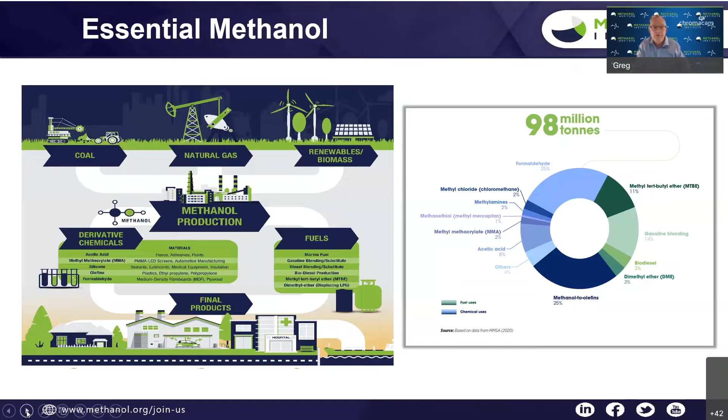Methanol, CH3OH, is made from synthesis gas, a combination of hydrogen, CO, and CO2, and these elements can come from several pathways. Recently, the Methanol Institute released a joint report with the International Renewable Energy Agency, Innovation Outlook Renewable Methanol. This is the first comprehensive assessment of renewable methanol.

These days, we all like to color code our fuels. For methanol production, at one end, we have coal-based methanol, which is pretty much exclusive to China and could be considered brown methanol. Conventional natural gas-based methanol is gray. Blue or low carbon methanol will be based on natural gas feedstock with the addition of renewable electricity or green hydrogen, and possibly CO2 captured from a neighboring industrial facility to reduce a plant's overall carbon footprint.

Now, green methanol can be biomethanol produced from biomass gasification of municipal solid waste or forestry residue, or from biogas produced at landfills, wastewater plants, or animal agriculture.

Green methanol also can be made from green hydrogen produced from renewable electricity through electrolysis, plus CO2 from either biogenic sources, flue gases from essential industries such as steel and cement, or in the future from direct air capture. This is often referred to as e-methanol, which is an electrofuel, an e-fuel, a synthetic fuel, a power to liquid fuel. We have a lot of names.

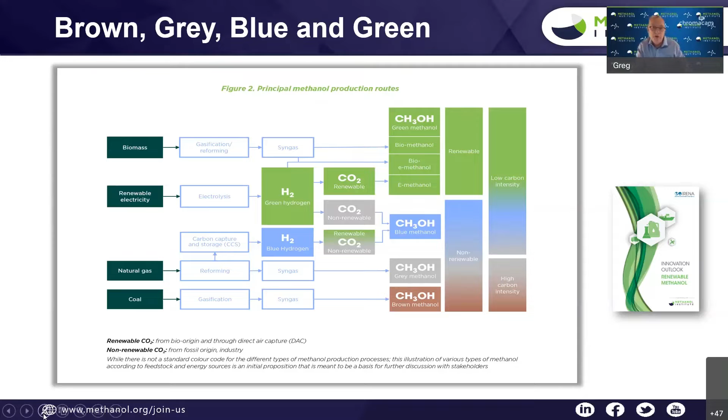Often these two green methanol pathways, biomethanol and e-methanol, are referred to broadly as renewable methanol. Now, the challenge over the next decade will be the ramp up to production of biomethanol and e-methanol to greater commercial volumes. This is a map of current biomethanol and e-methanol facilities in operation and those that are now under development.

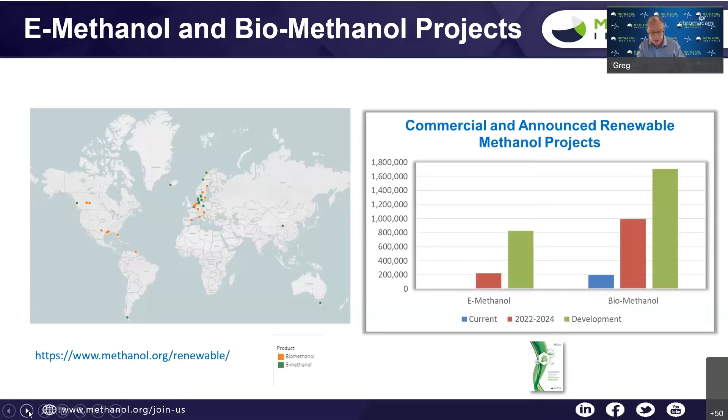Current commercial plants and announced projects represent roughly 1 million tons of e-methanol production capacity and 3 million tons of biomethanol production capacity. But keep in mind the methanol molecule CH3OH is the same whether it's produced from gray, blue, or green feedstocks. Conventional natural gas-based methanol can be used in new builds and retrofit vessels today, with the introduction over time of more biomethanol and e-methanol as we facilitate the transition to low carbon and net carbon neutral methanol, with more ships using methanol as the fuel and the market expands.

Our joint report with IRENA also provided intricate assessments of the cost of renewable methanol production today and where it's heading in the future. Current spot market pricing in the U.S. Gulf Coast is $380 per metric ton, or the high end of the light gray bar shown on the bottom here. Depending on feedstock costs, some biomass and biogas processes are economically competitive today with conventional methanol, as shown in the green bars. Where we can expect to see dramatic cost reduction in line with expectations for more affordable green hydrogen is in future production costs for e-methanol, pictured here in the blue bars.

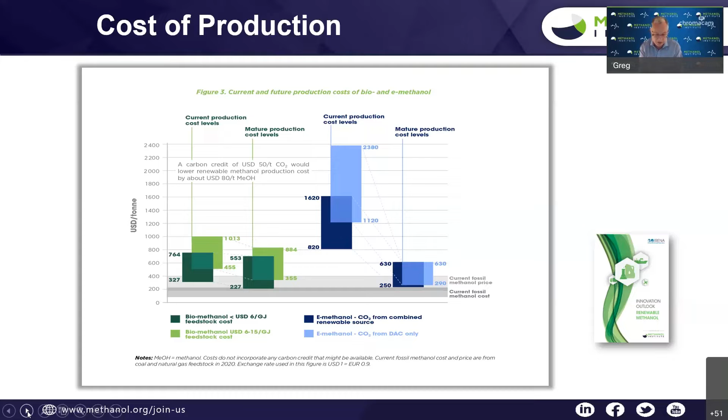All alternative fuels will be more expensive to produce than conventional fuels. That's just a fact. How much more expensive depends on the availability and cost of renewable power or biogenic feedstocks, and the proximity to major alternative fuel hubs. Based on our experience with both e-methanol and biomethanol production, we can readily predict costs will fall with scale and improved efficiencies to become competitive with conventional fuels.

Methanol does have half the energy content of diesel bunker fuel, so you need nearly twice as much methanol to provide the same range as diesel fuels. But even on an energy adjusted basis, we've seen that methanol has been price competitive with traditional diesel bunker fuels.

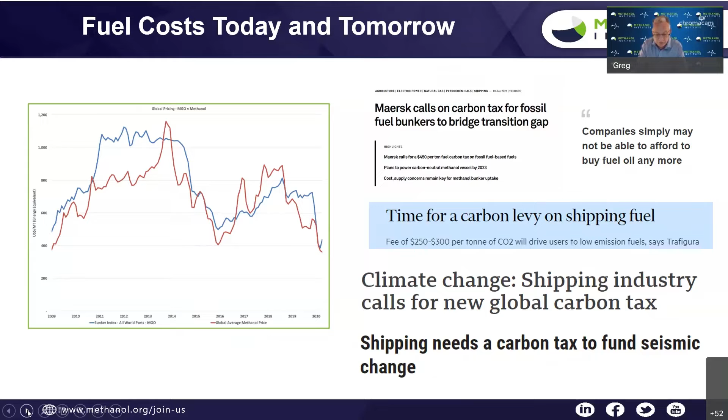Today, there's a call by many, including the world's largest shippers, for a carbon tax on diesel fuels. Clearly, a tax on diesel bunkers would dramatically change this pricing picture for marine fuels, with the only available options today besides diesel fuels being advanced biofuels, LNG, and methanol.

When we look at fuels for the transport sector, energy density matters. Again, while methanol is just half the energy content of diesel bunker fuels, it's a liquid at ambient temperature and pressure with a higher energy density than other alternative fuels like ammonia, hydrogen, or batteries. From the perspective of energy density, logistics, and fuel storage, methanol is a much more efficient energy carrier.

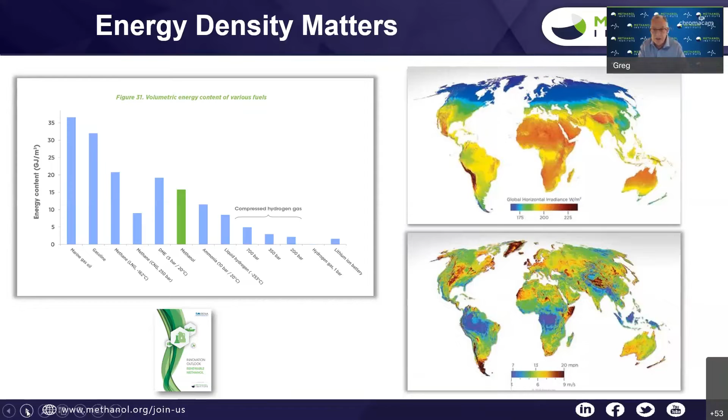If we think of the global resources for solar and wind power, it'll be much easier and cheaper to turn these green electrons into liquid methanol and move it around the world.

Today, around the world, methanol is being used as a fuel for cars, trucks, ships, industrial boilers, cook stoves, kilns, home heating, and as a hydrogen carrier for fuel cells. As we look ahead to potential markets for road transport, and particularly in shipping, methanol demand could greatly exceed the growth we've seen to date.

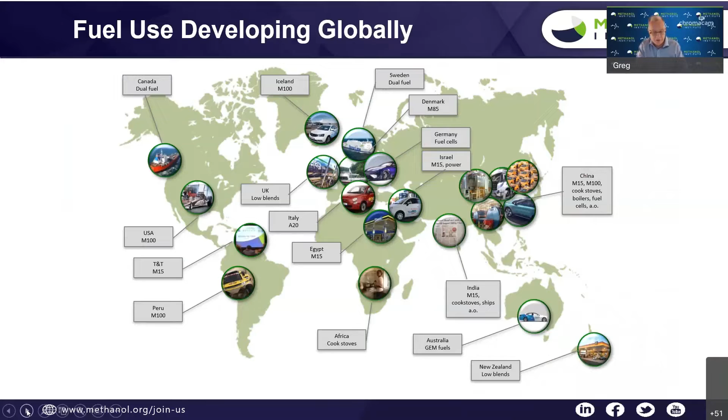There are now a number of leading shippers such as Maersk, which are not only considering methanol as marine fuel, but have already adopted it or are announcing plans to include methanol within their fuel pool. These first movers understand that little time is left to wait on potential solutions which might fulfill 100% of the 2050 goals. We don't have 30 years to wait.

Maersk announced in March that their first carbon neutral vessel would launch in 2023 running on methanol, a full 7 years ahead of schedule. Recent press stories note that Maersk is now looking to place a $2 billion order for 12 15,000 TEU container ships running on methanol.

And I'm sure this makes Kjeld very happy.

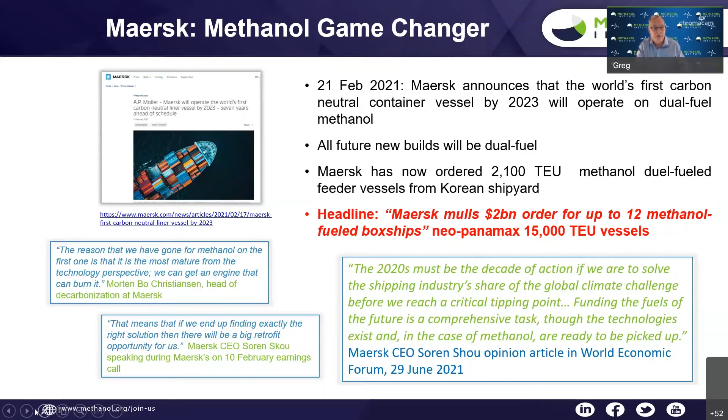Maersk sees methanol as a viable option for both new builds and retrofit vessels. There are vessels on the water today using methanol dual fuel engines, including a dozen 50,000 deadweight ton chemical tankers with MAN two-stroke engines.

One of the world's largest RoPax ferries has been operating on methanol for 6 years now, using Wärtsilä four-stroke engines. We've run a pilot boat in Sweden and a dry bulk barge in China on methanol. There are also vessels that use methanol as a hydrogen carrier for the hotel load or for propulsion. These ships have allowed more than 100,000 hours of operation on methanol so far.

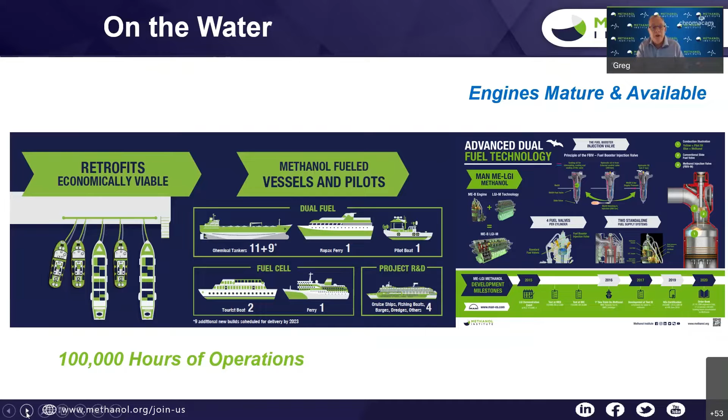More methanol-fueled ships are on the way. As you can see from these recent announcements, the vessels being built now include more chemical tankers, tugboats, workboats, yachts, and cruise ships. Methanol can be an attractive option for ocean-going vessels, short-sea shipping, workboats, port and inland waterway type vessels, and fishing fleets.

Global methanol producers like Methanex and Proman have invested in methanol-fueled vessels, showing industry support as first movers. And we'll hear from Proman shortly.

Last fall, the IMO adopted safe handling guidelines for the use of methanol on board vessels under the IGF code for low flashpoint fuels. This has been an important milestone in the growth of methanol as a marine fuel. As you can see here, this process took a number of years. And while LNG paved the way for methanol, methanol's adoption can be a model for ammonia and hydrogen in the future.

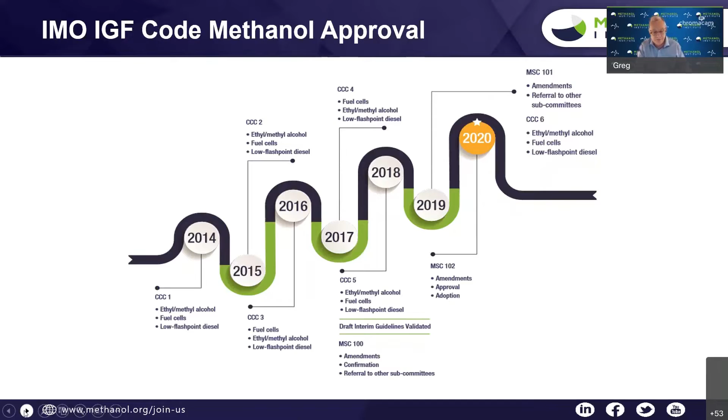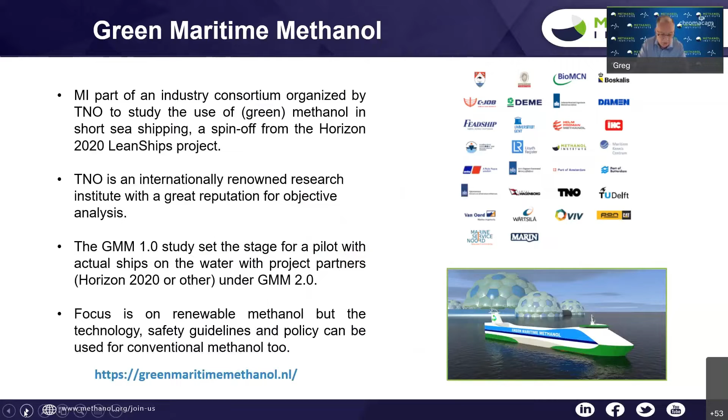Let me quickly mention two projects that we're involved in Europe. First is the Green Maritime Methanol Program in the Netherlands. This is moving to the next stage, GMM 2.0, with the adoption of methanol for short sea shipping in the Netherlands. The Fast Water project, also in Europe, is looking at workboats and river cruisers, with a pilot boat launching in Sweden this fall and 2 tugboats launching in the port of Antwerp early next year.

Now, methanol is one of the world's most widely shipped chemical commodities. Again, we produce 100 million metric tons. About half of that will move from one continent to another. Methanol storage is already available at more than 100 of the world's largest ports.

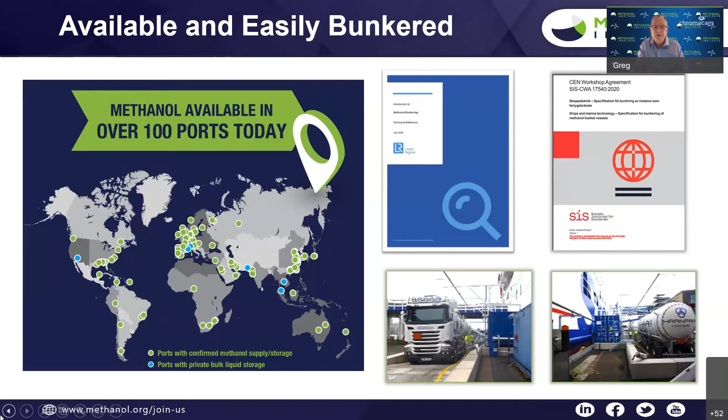Again, as a liquid at ambient pressure and temperature, the handling of methanol is very similar to that of diesel bunker fuels, making methanol an affordable option for bunkering.

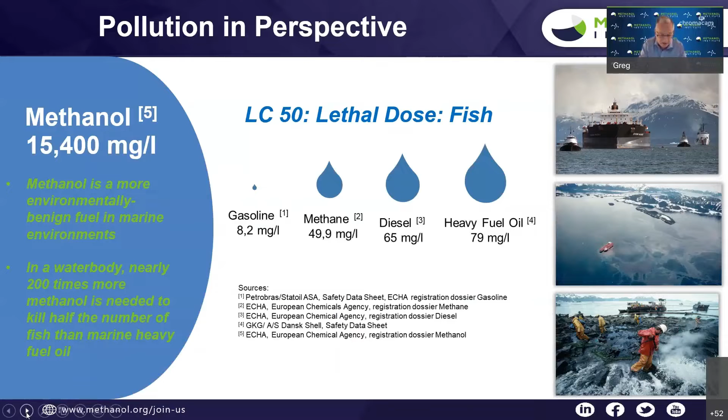Methanol is also a more environmentally benign fuel than diesel bunkers. Nearly 200 times more methanol is needed to kill half the population of fish in a water body compared to heavy fuel oil. I like to say that if the Exxon Valdez had been filled with methanol instead of oil, you could have gone back to that site 2 days later and not found a trace of methanol.

I will talk about the MAN B&W LGIM engine - it's liquid gas injection methanol engines. We have a number of dual fuel engines today, and except for one, which is a MEGA engine based on the Otto cycle, they are all diesel-based engines. That means the diesel principle applies for methane, ethane, methanol, LPG, and also the coming new ammonia engine. We expect there will be several different fuels in the future.

As technology providers, we listen to the market and see what is required, and based on that we make priorities in our development and planning.

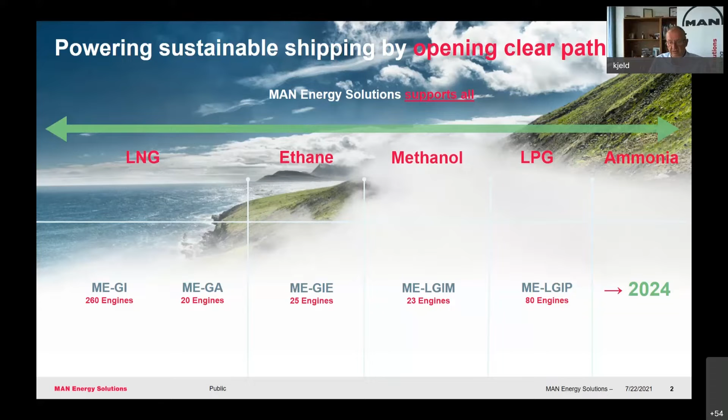The history of our first methanol engine: we could see the need from the market, so we made demonstrations here in Copenhagen on our test engine number 1. Then we had tests at Mitsui, one of our big licensees, and another big licensee at Hyundai. Then the first sea trial on methanol was here in 2016, so it's been quite a number of years where we have actually been operating on methanol.

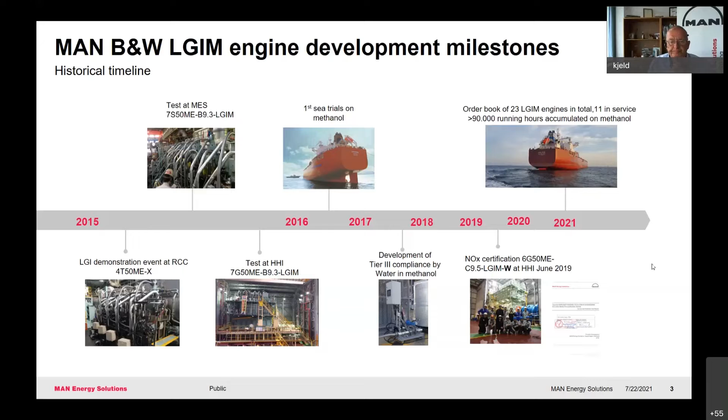Methanol itself, as Greg also specified, has a specific energy compared to other liquids - about twice the amount is needed to give the same output as MGO. But the efficiency of the engines, the power output, and everything is exactly the same when we base it, as we have done here, on the diesel principle.

We will not be sensitive to the quality of the fuel itself or to ambient conditions. The operator will really not feel whether he's operating on methanol or operating in diesel fuel mode.

Also mentioned by Greg, we have the methanol at normal atmospheric pressure. We have a supply system - quite simple - at 8 to 10 bar, the same as we use for MGO, and a booster system which pressurizes the methanol up to 600 bar when it's injected into the combustion chamber.

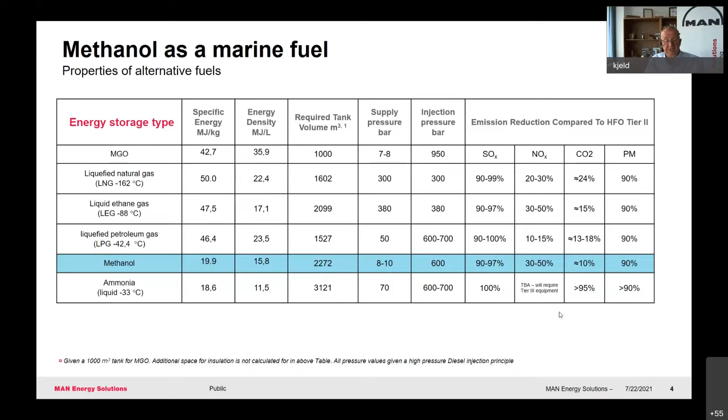SOx, NOx, and particulates have quite a reduction, and also 10+% reduction in CO2 when we compare to what we have seen on our heavy fuel oil burning engines.

Today we have the G50 and S50 - 50 is the bore size in centimeters. Our engine program goes from 3 megawatts up to 83 megawatts in different engine sizes, so not all engines in the program are actually ready now to burn methanol.

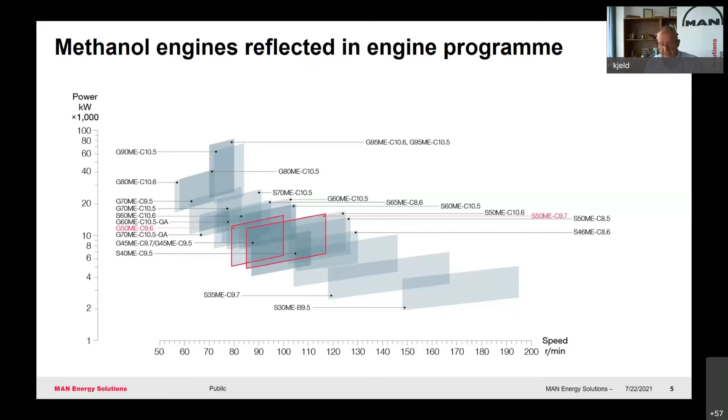But again, coming back to the request from the market, there will be many more different engines that can burn methanol in the future - at least this is our expectation. This is our reference list today, and we have a total of 23 engines ordered for methanol operation.

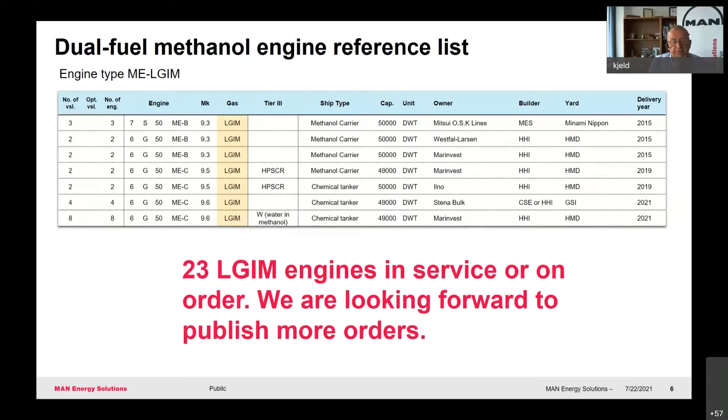The 2,200 TEU feeder container vessels for AP Møller, as Greg also mentioned, is not included in that, but will be, of course. Without going into more detail, I would say we expect a lot more orders for methanol engines shortly - in due very short time.

The complexity of the installation and the price are also very important when you compare the different dual fuels. Together with the Methanol Institute, DNV, and Hyundai, we have made a study to see what the real price difference is.

It's for a tanker of about 54,000 cubic meters. If you say the capex here is 100%, then it would be 110 for the methanol burning engine and vessel, but it will be 122 if it's LNG. So there is actually quite an increase in capex when you use LNG instead of methanol, and it will still be the same efficiency you get out of the two vessels.

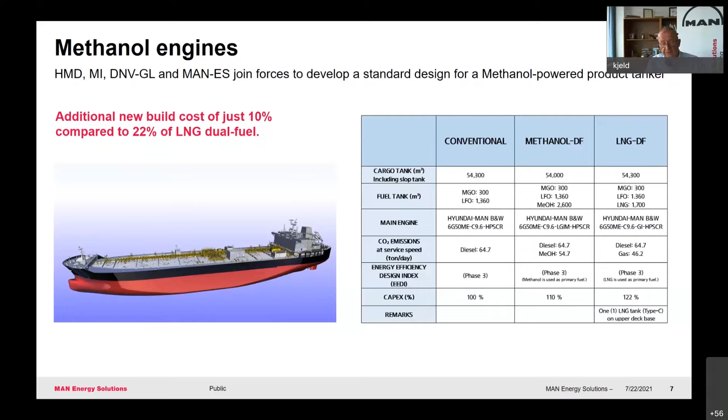Here is the world's first barge-to-ship bunkering of methanol. Of course, that will be much more needed as non-methanol carriers now start to burn methanol on board.

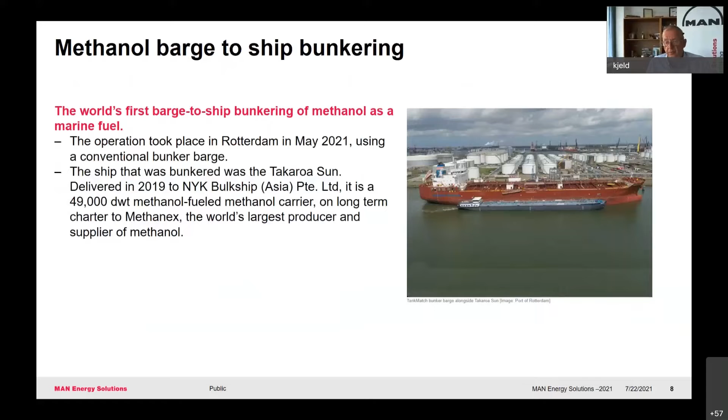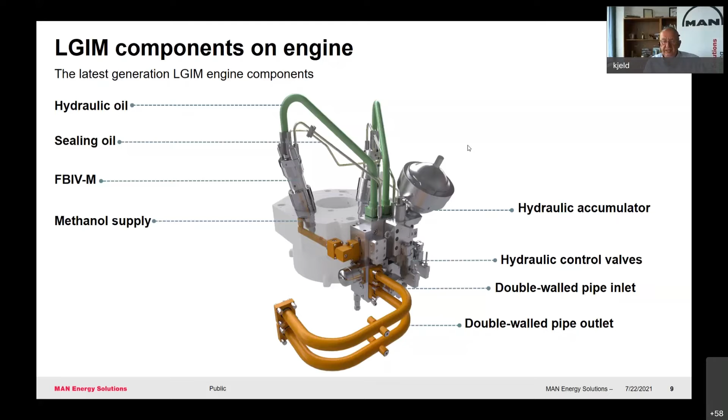Methanol is not really a good lubricator, so we also use sealing oil where we have lubricating of the moving parts and so on. So all this is, of course, considered in our design and so on.

Here we have a sequence of pictures for different fuels: gas oil, methanol, methane, ethane, and LPG. You will see here in this sequence how the burning actually shows, but also the real ignition. From this movie sequence, one can clearly see that all the fuel burns in the classical diesel process, and that the level of soot radiation varies significantly. And if you see here in the last one, with methanol, it emits a very low level of visual radiation, and that's of course also an advantage.

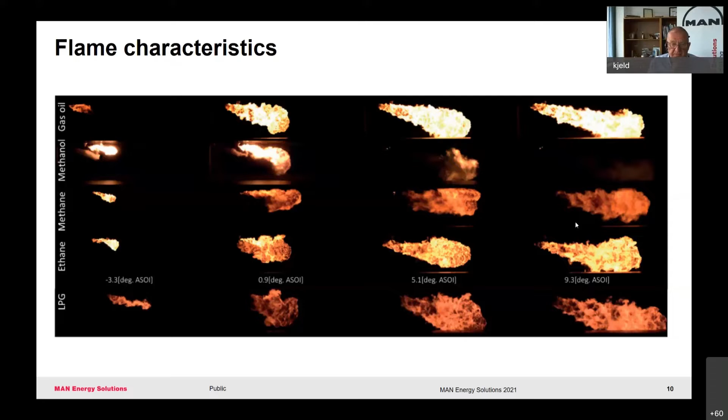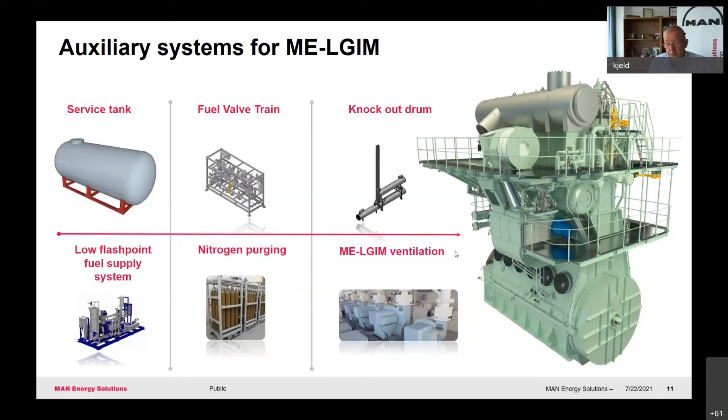We go into hazard investigations for all the dual fuels, new fuels, low flashpoint fuels, which are introduced to our engines, and we do a lot of them together with classification societies, yards, engine builders, and of course also operators and ship owners.

We have a fuel gas supply system, and as mentioned before, 8 to 10 bar before going into the engine, very similar to a normal fuel oil burning system. We have a low pressure pump from the tank. After the tank, we have a high pressure pump for the circulating system and so forth. And it really works and is quite simple.

Also, you can say this is shown or reflected in the CapEx difference between the LNG cryogenic type systems and here the liquid systems.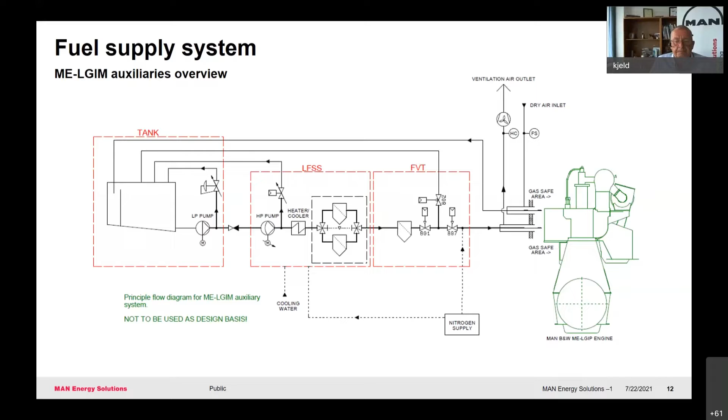We normally have in the diesel process this very high efficiency, but we also have a high peak temperature in the combustion chamber actually creating a lot of NOx. Now the NOx level for methanol is relatively low, 30 to 50% lower than it is for fuel oil. So you can say you have a good start, but on top of that, we are actually able to put water in and mix it with the methanol and reduce the peak temperature and therefore the NOx formation. Otherwise, in the other dual fuels, you need to use an SCR or an EGR solution in order to be in compliance with Tier 3.

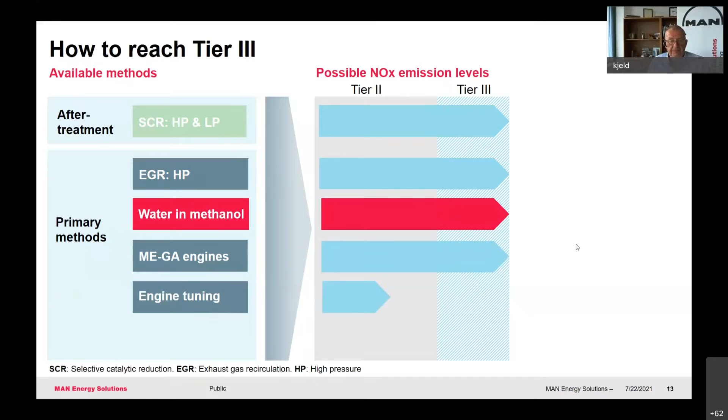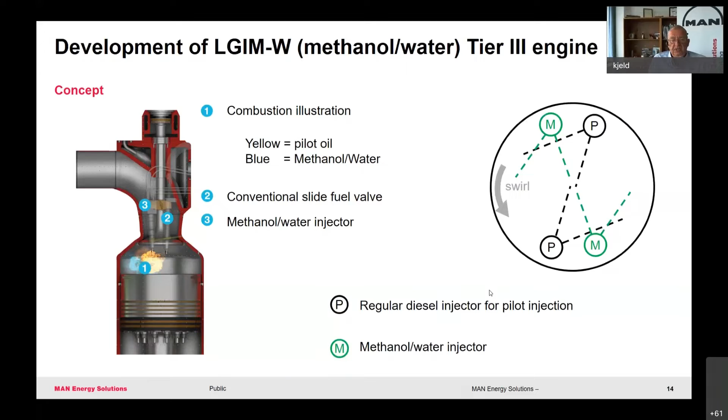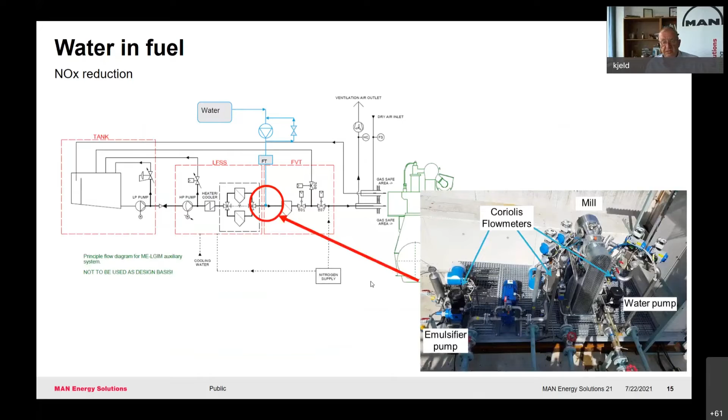This is how we blend water in, and the last many engines sold are actually sold with this system where we put water into the line here and mix it very easily, you could say, in a mill into the methanol before it goes into the engine, thereby reducing the NOx level.

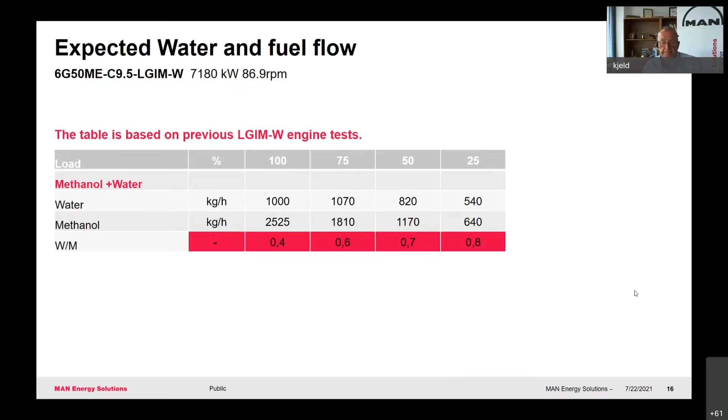This I will not go in detail with. Greg has already shown that, and as Greg said, we will be happy about this, and for sure we are very happy and speak a lot with Maersk about it also in these projects, that's for sure.

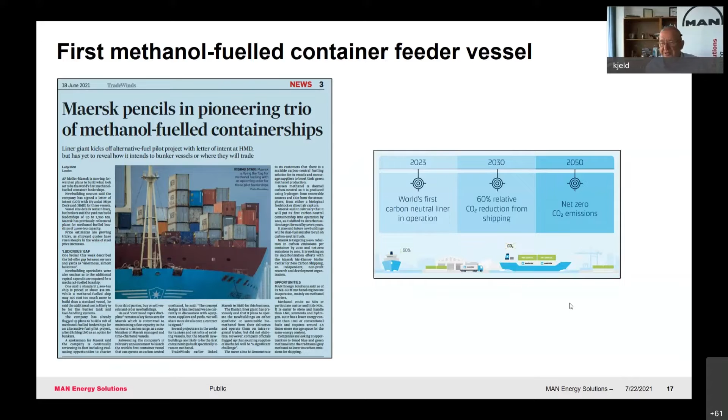We have a methanol paper, if you like, and there are contacts here where you can see.

The diesel principle also has this, or you can say the beauty of the diesel principle, but basing that on the dual fuel engine, is that you can go from an MEC, that's a full electronic control engine, and you can retrofit for LNG, LEG, methanol, LPG, and coming for ammonia. And we have already made some of these retrofittings.

We have retrofitted one of the MEC engines to ethane, 3 to LNG, and 7 or 8 now for LPG, and 7 or 8 are still waiting in process on an order. There will be much more in the future. And if the CO2 taxes hit on and so forth, then suddenly there will be a bigger business case to go for those alternative fuels.

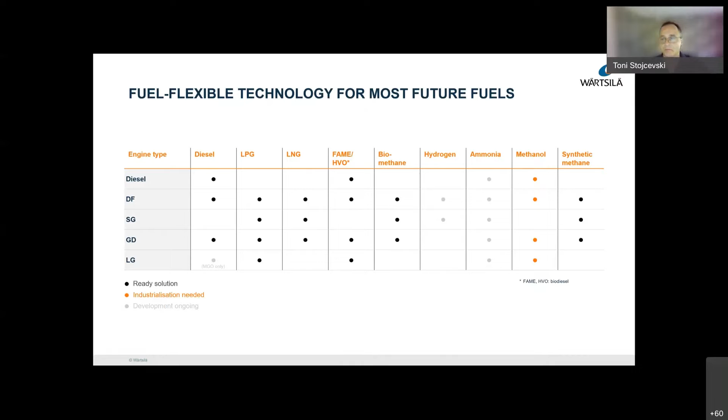We have invested around 50,000 engineering development hours in methanol technology. The first concept study was done back in 2011, where we started looking into alternative fuels and identified methanol as one of the best options and alternatives compared to HFO. Back then this was driven by the SECA legislation and SOx, now we are moving into decarbonization, but the availability and option for methanol is still there. Since 2013 we have been continuously investing development hours, and we have 6 years of continuous operation on Stena Germanica since the conversion, so there is great accumulated knowledge we can apply to future solutions.

Now, not repeating what was said by Kjeld and you, Greg - I think both of you made quite some good points, so I will try not to say the same things again. But when choosing combustion technology for methanol, we started from the phase of methanol, and methanol is a liquid. It's an alcohol, so compared to all the other alternative fuels, it's liquid at atmospheric pressure and temperature. Injecting it via port injection, as you would normally do with gas, would mean the methanol is in touch with the port inlet and the combustion chamber. And we all know methanol is highly corrosive, which might affect the lifetime of the engine.

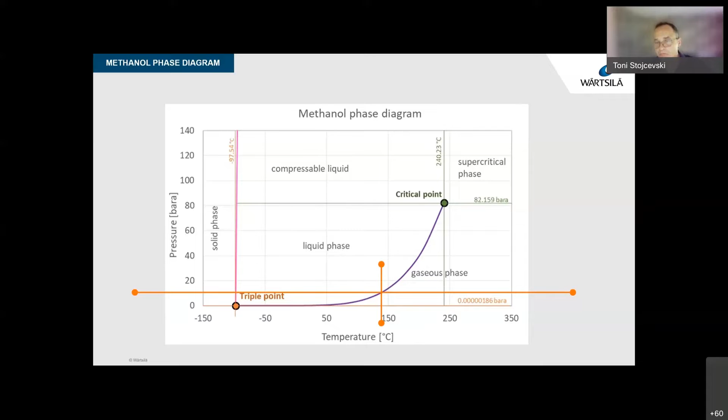The technology layout that we chose was originally adapted from the gas diesel engine, and then further developed for a conversion to Stena Germanica. So we started from an existing technology and then did the tweaks to accommodate methanol.

The main development is around the injector, which in this case is a dual fuel injector that can accommodate both fuels simultaneously in the same body. So we use one injector for both fuels, and this injector is designed to have 100% output on either methanol or diesel.

The control of the injection for methanol is done by hydraulic oil and a solenoid valve, electronically controlling the opening and closing of the methanol injection. The methanol is injected at high pressure in a common rail system, pumped by a single pump before the engine, at pressures similar to what we saw before, around 600 bars in the common rail.

We also use the standard diesel jerk pump for both pilot fuel injection and full diesel output operation, so the same pump is used. Switching between fuels is simultaneous and seamless. You will not notice any change in operation mode or drop in load or efficiency, and it can happen at all loads, back and forth.

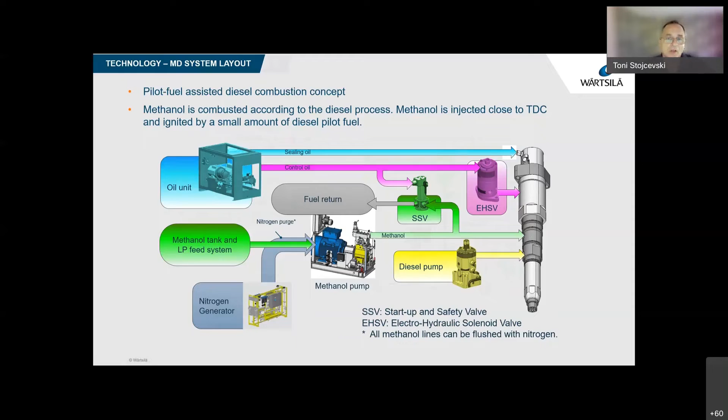How this works is that when the piston is close to top dead center, the cam presses the diesel jerk pump, which injects a small amount of pilot fuel in this yellow line, and that is ignited by compression and temperature. At that moment, when there is an ignition flame in the combustion chamber, we start injecting the methanol on top of that flame, which is directly ignited and combusted, pushing the piston down. So the methanol burns at the flame, and it burns completely without getting in contact with any parts in the combustion chamber.

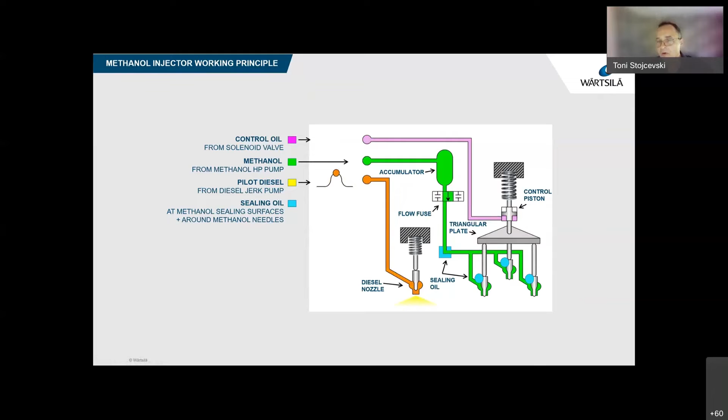The performance of methanol combustion shows that NOx levels are lowered by 60% in our case. So we are not as near to tier 3, but quite close, and we have also done tests with water blending and see that we can reach tier 3 compliance.

When we talk about retrofit conversion, it's important to notice that converting to methanol as fuel is not seen as a major conversion by the classification societies, and as such it will not require new tier compliance. We can just prove that we have lower NOx emissions and don't need to recertify the existing tier compliance, but can keep it as is. For retrofit, we are not compelled to meet tier 3, maybe only in certain cases where local legislation requires it, and that can be achieved by water blending.

We see that combusting methanol creates zero particulates, which affects the smoke emissions. So the only smoke emitted comes from combustion of the pilot fuel, and it's barely visible, maybe at very low loads where there is more pilot fuel ratio compared to methanol, but on higher loads there is no visible smoke with methanol.

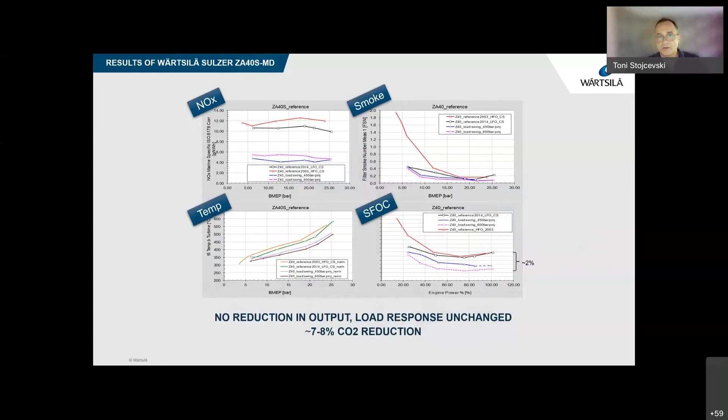So there is an addition of new piping system, and we do change the cylinder head because we have a bigger injector, but none of the engine parts below the cylinder head are changed. So the engine remains intact when it comes to piston rings, liners, and all the parts in the lower part of the engine. Of course, there is a lot of cabling and a lot of automation and safety systems.

This is quite an installation. It's specific, depends on what is your starting point and how old the engine is. This ship was originally commissioned in 2001, and it was already 14 years old when we retrofitted it to methanol. It's now 6 years in operation with these 4 converted engines in methanol.

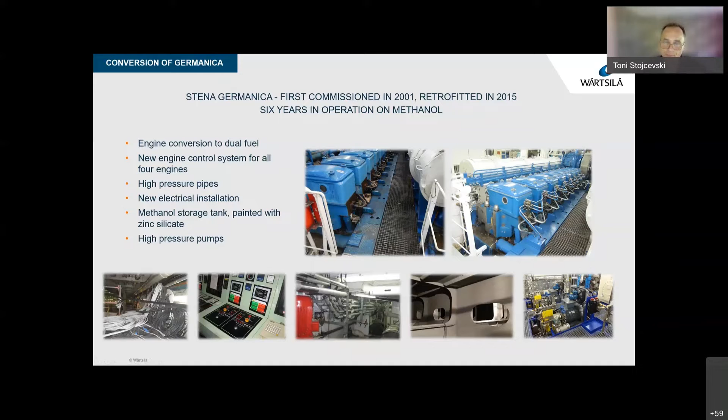We do have a plan for releasing another engine type based on the 32 bore. This is a development which is planned currently, and it's proven technology. The Wärtsilä 32 engine is already on the market, and we have around 4,000 engines delivered since the conception of the 32. It's still a portfolio engine that we deliver today and will be delivering in the future.

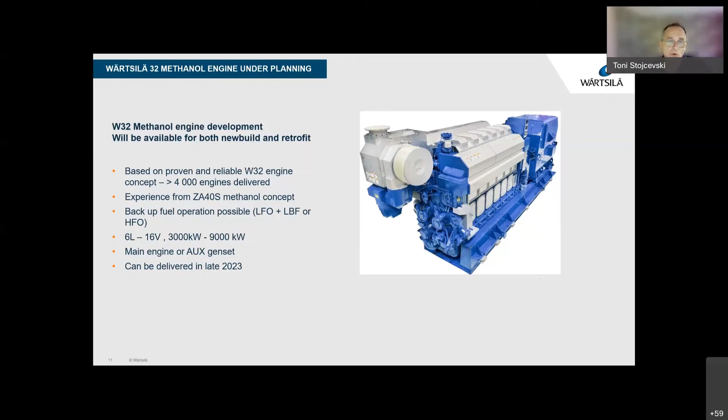It's in the power range from 3 megawatt to 9 megawatt, and fits a lot of installations, both as a main engine or as an auxiliary genset. This engine will be based on similar technology to what I just showed, and could be delivered both as a retrofit of the existing 32s or as a new 32 engine from late 2023.

Looking into the future, renewable fuels are the path forward, and methanol as a transition to this is an excellent starting point, as we saw from Greg's presentation, that it can be produced from a variety of feedstocks, and the main benefit is that it's liquid at atmospheric temperature. It does not require cryogenic storage. It can easily be transported through various supply chains and bunkered on board. So we do see that going forward, bio and methanol as a hydrogen carrier would be a great essential fuel for the path to decarbonizing the shipping industry.

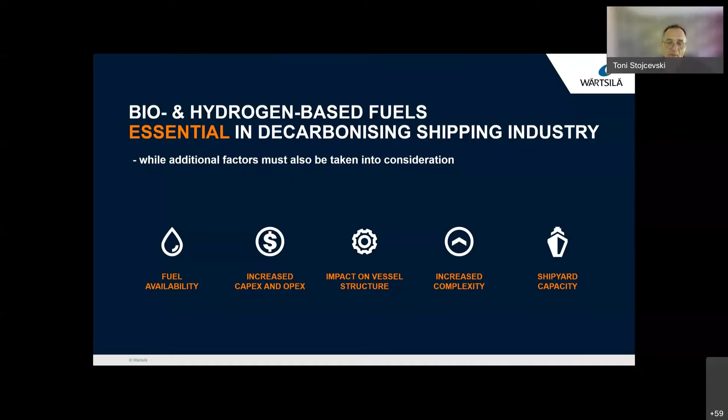With that being said, the last point from myself and from Wärtsilä is that, looking into the future, we will have multi-fuel engines that will have a different fuel injection system and will be capable of burning various fuels like hydrogen, ammonia, methanol, and other possible carbon neutral fuels. And this is the path that we will continue exploring and developing our engines.

Okay, hi, good afternoon everyone. Hopefully the technology doesn't fail me, let me just try to share my screen. Hopefully, Greg, you see it in presentation mode. Well, let's get your notes too, but no, it's the 2 slides. That's odd, because I see it's in presentation mode. That's better, I did it. Oh, did it change now? Okay, yes, okay, try it again. All right, that's good.

Good, thanks, all right. So good afternoon everyone. You know, technology is something that sometimes fails with all these webinars we're doing, it's definitely been different. So as Greg mentioned, I'm here to offer the view and our perspective as a producer, and how we view methanol as a future fuel in the market.

Let me start by giving some background on our company. Proman, we're a global leader in petrochemicals with methanol, ammonia, and urea ammonium nitrate assets globally. As some of you may know, we're actually the second largest producer of methanol in the world, and we have our production assets in Trinidad and in Texas. We always boast that we have the largest methanol plant in the world - well, at least we used to - which is in Trinidad, the M5000 plant, and the smallest methanol plant possibly in the world too, which is in Pampa, Texas.

We have also a plant in Beaumont, Texas, where we have a joint venture with OCI, and we have a methanol plant in Oman, which is the OMC plant. Because we're also involved in ammonia, we have our joint venture with Koch for ammonia plants in Trinidad.

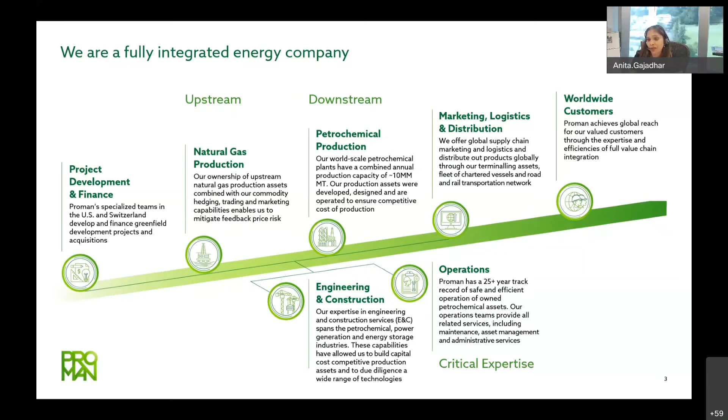So many of the presenters before have spoken about the challenges we face in the international maritime sector, but one of the major challenges we will face in the upcoming years, of course, is the IMO reduction rules on carbon intensity, and the fact that by 2030 we have to shift to at least a reduction of carbon emissions by 40%, and by 2050 carbon intensity requests to reduce to about 70%.

Now that's the IMO, and it's been debated because a lot of the global leaders have even stricter regulations. Last week the EU came out with their Fit for 55 obligation, where they'd like to reduce emissions by 55% by 2030 in the EU, and become carbon neutral by 2050, which is different from the IMO's targets, and it's something the shipping industry will have to work together to try to meet. We've also heard the US speak about their carbon neutral targets by 2050, and Great Britain has pledged to reduce their CO2 emissions by 78% by 2035. Even China is saying they would like to be carbon neutral by 2060, I believe.

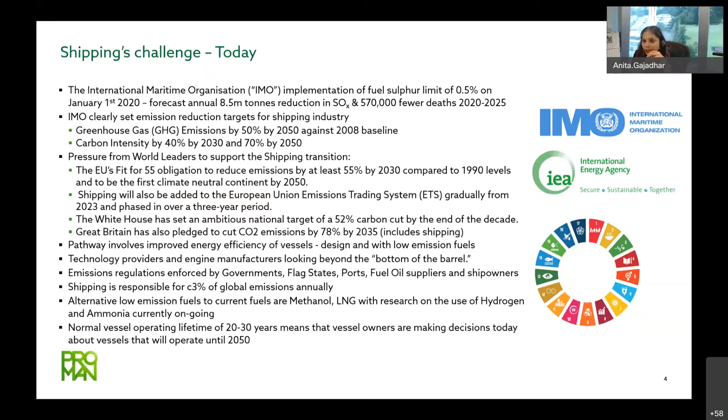Shipping, as many of you will know, is responsible for 3% of global carbon emissions globally. And it might sound very small, but if you look at the industry as a whole and the targets we have to meet, it will require a significant amount of fuel - not just methanol, but other alternative fuels, which we've been hearing more and more about in recent times.

So why methanol? I don't want to go into a lot of details because Greg would have also mentioned a lot of these things, but it is a clean burning fuel. We also view it as cost competitive. When you look at the long-term pricing, which I will speak about later, it is competitive when compared to alternatives. In terms of bunkering, it is easy and safe to bunker, and available in more than 122 ports, as previous presentations would have shown. The capex for modification of vessels is a lot cheaper than LNG, so you don't have to put out as much in capex, and it is fully biodegradable, which I think is one of its strongest points.

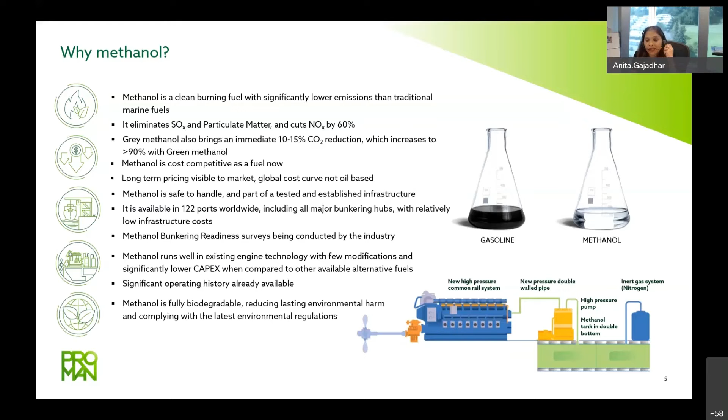I won't go into too much detail here because Greg gave a very good explanation on gray methanol, blue methanol, and green methanol, and the fact that whether methanol is produced as a green, blue, or gray molecule, it's the same molecule with the same characteristics.

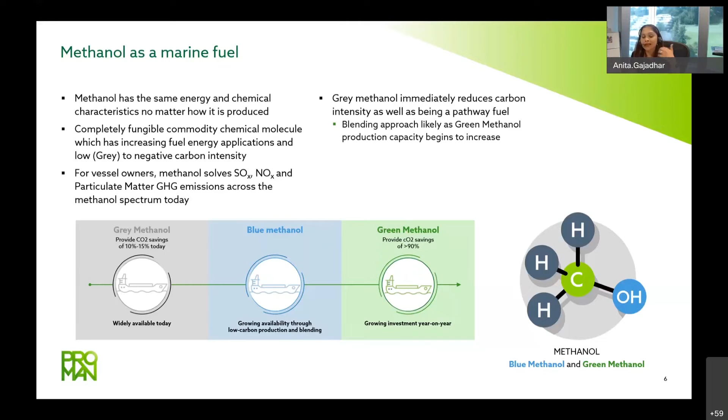This is important because there's a lot of talk now about carbon trading, and the question of how you move green methanol, or low carbon emission products, to ensure you reduce the carbon footprint in that transportation. The good thing is that if methanol is produced in its green form, let's say in Canada, and we produce gray methanol in Trinidad, we could work together with partners to swap product around, to benefit from that lower carbon footprint without incurring additional emissions to transport it, for example, to Europe.

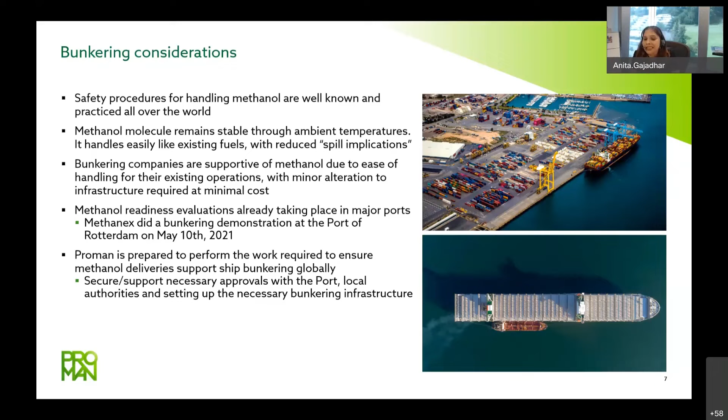Again, I probably wouldn't get into too much detail since it was mentioned, but methanol is easy to bunker. The capital infrastructure required to transform a bunker barge into a methanol bunkering barge is very low. Methanex was very successful in bunkering methanol in Rotterdam in early May, and at Proman we would also like to engage in projects like this. We continue to have discussions with bunker suppliers so we can set up a similar demonstration, probably in a different port, to show how easy methanol is to bunker compared to LNG.

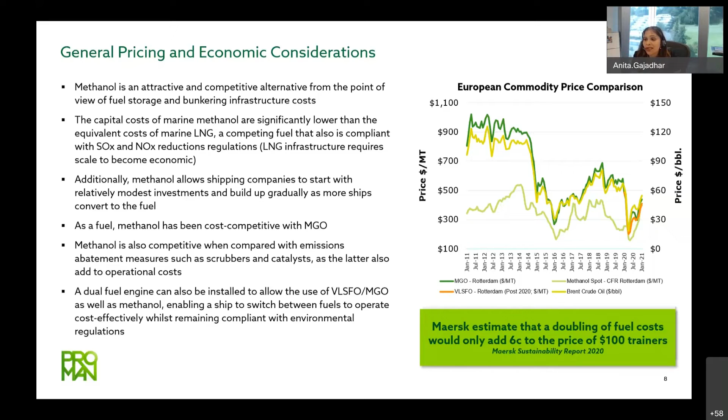In terms of scalability, most people already spoke about Maersk, but the 2,100 TEU vessel that Maersk announced would require about 25,000 metric tons of methanol per year. In fact, if they go forward with the 15,000 TEU vessel, that might require as much as 70,000 tons of methanol per year. One of the challenges we always hear in the industry is that there's not significant capacity, so how do we build capacity for methanol?

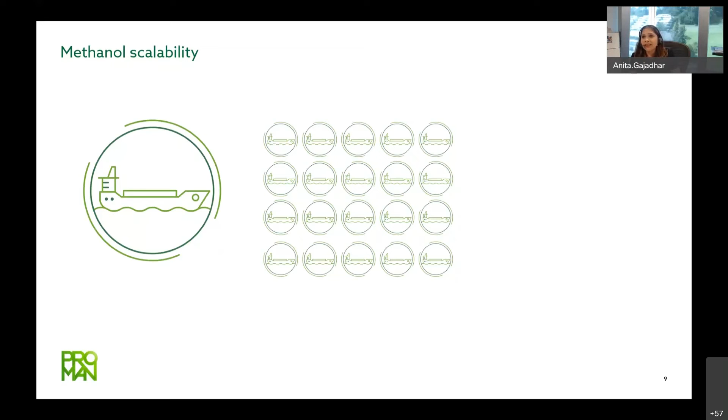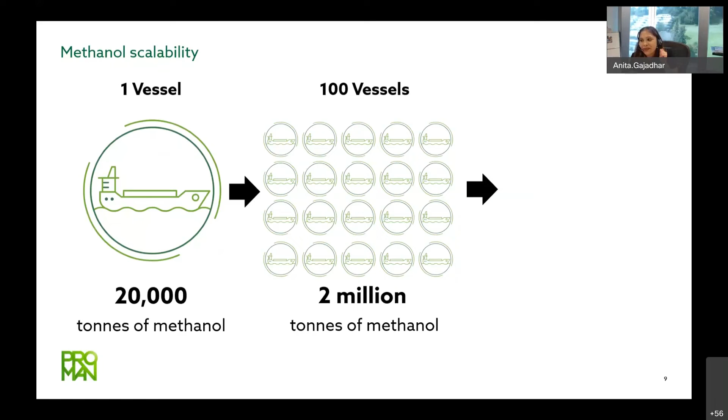Let's put it in perspective. If we average it out, one vessel requires 20,000 tons of methanol. 100 vessels will require 2 million tons of methanol, and the global vessel fleet is about 56,000 vessels. So we don't need a lot of vessels to convert to get to 100 vessels requiring 2 million tons of methanol, and right there we have the need for one new methanol plant.

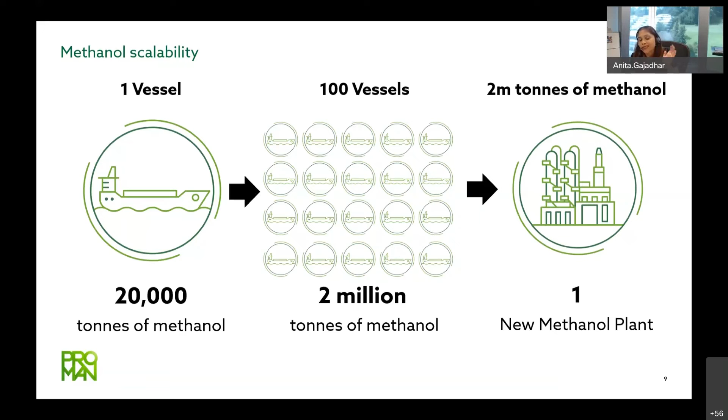It takes about 3 years to develop a methanol plant, so that concern about whether methanol tons will be available - we know it can be made available. They always talk about the chicken and egg situation: once there is demand for methanol, we as producers will build plants to meet that demand. We've seen this over the last 6 years in particular, where there's been huge demand for methanol from the MTO sector, and there's been increased capacity to meet that demand over the last 5 years.

As Tony mentioned, methanol is rich in hydrogen, and it has an important role, we view, in decarbonization. It's easy to manage, inexpensive to store and transport, and we view it as having a low carbon pathway when derived from natural gas, either in its traditional gray form or when combined with carbon capturing as blue methanol.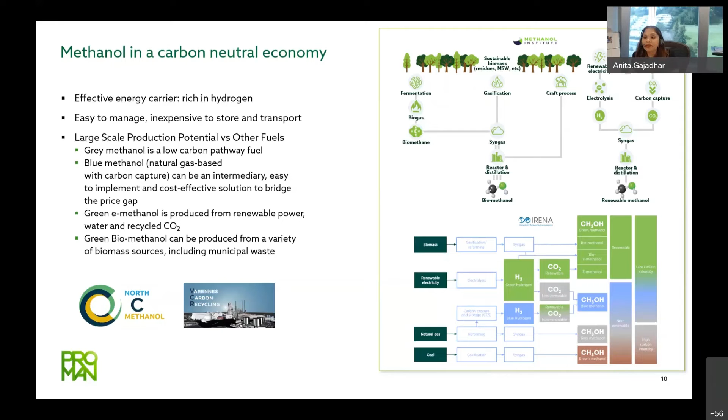Green methanol, as you all know, is also gaining a lot of momentum, especially since Maersk has indicated that their intent is to use green methanol, either bio or e-methanol. Green methanol can be produced 2 ways: e-methanol, derived using hydrogen from renewable electricity and CO2, or biomethanol, when produced from sustainable biomass.

As the world shifts to this green future, with major regions like the United States and EU trying to meet their targets, Proman is actively leveraging our operational expertise and deep industrial knowledge to capitalize on the transition to a greener economy via our investments in and strategic partnerships with external stakeholders and the promotion of methanol as a cleaner fuel. Our plants in Trinidad at Point Lisas actually already utilize CO2 from our ammonia assets, so one can argue whether we already produce blue methanol because we're capturing the CO2 from the ammonia plants.